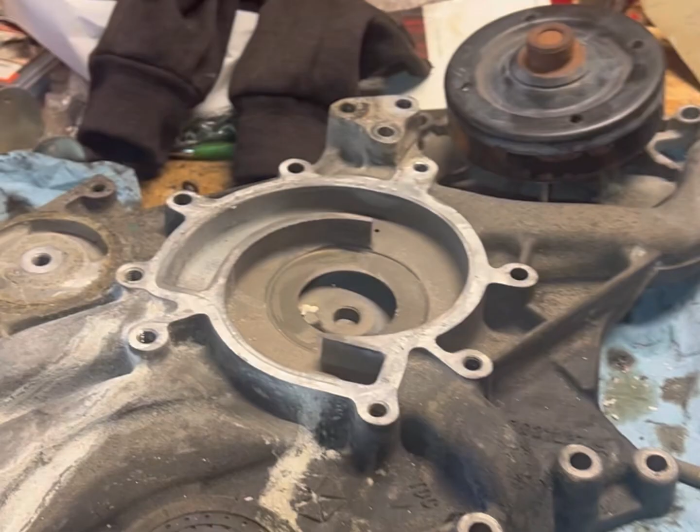So a cracked head would be the only issue with this pitting. And then also the water pump was bad, because if you look under here, you can see that it was leaking. I'm doing some research - I think I can fill that with some JB Weld, and of course get a new water pump.

Amazingly, the plastic housing survived the overheating, but we got everything off our heads. The bad head, obviously, we're just gonna get rid of, but the good head, we're gonna do valve seals, so that's why it's off.

Got the block cleaned up, and so we're waiting on our head and head gaskets for that, and they should be coming soon. We cleaned up our block here with one of these guys. Did pretty good.

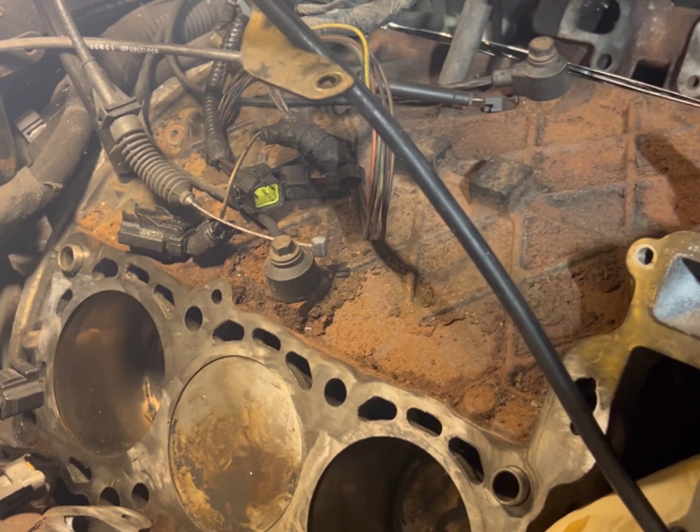Then what I'll do is, it left some plastic behind on there, so I'll just take some brake clean and clean that off.

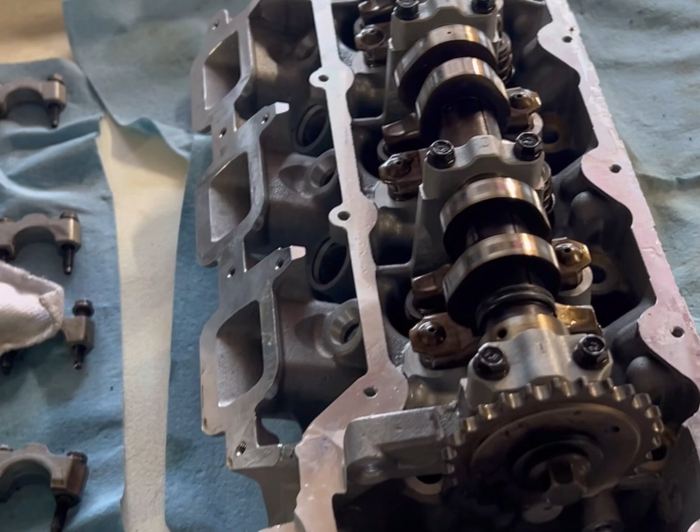Some of our parts that we ordered are the head gaskets. We ordered a new head for the driver's side. I did lap in the valves, so I got the head gasket on that side. Like I said, we got the cylinder head, and we also got some head bolts that came with the washers.

So I'm ready to throw my head in. The head that I ordered is from Rock Auto, and it's the right head and everything, but it came with an EGR block off plate.

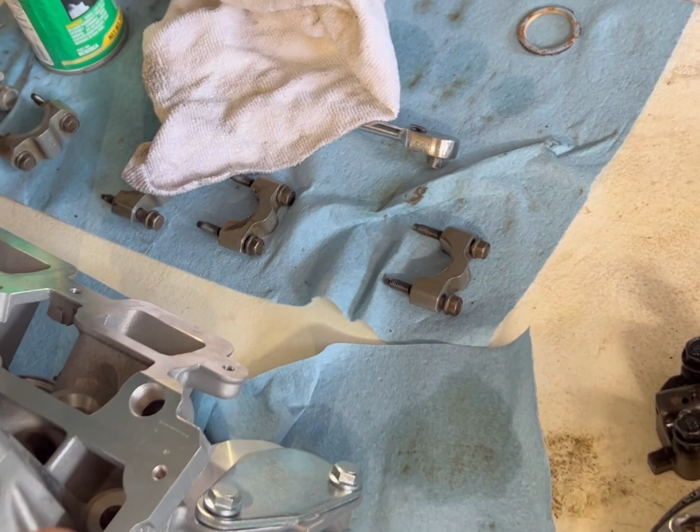The old head had that completely blocked off, completely filled in. So all they sent me with this head was the plate and the bolts - they didn't send me a gasket or anything. I'm only assuming that it needs some sort of something to seal it, so I put some RTV on there.

And other than that, I'm ready to put the head on. By the way, I soaked the lifters, the hydraulic lifters, in clean engine oil. I dipped everything - rocker arms were dipped in oil - and coated the bearing surfaces here with oil, and the cam lobes.

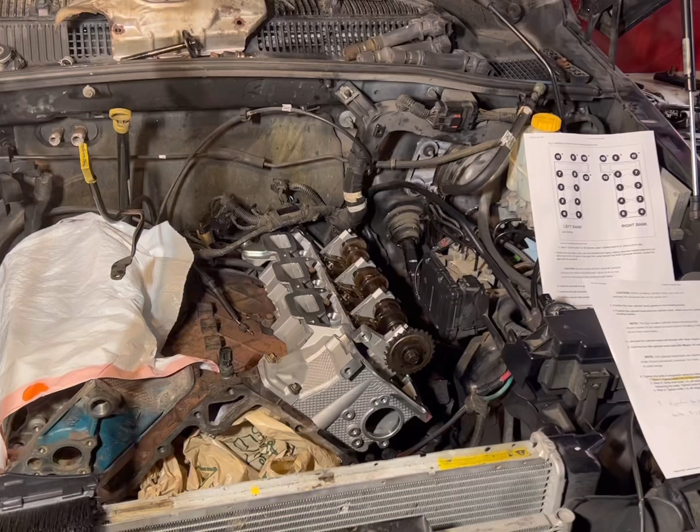All right, we're set up to torque head bolts. We printed out our sequence here online - pretty simple. Here's our sequence.

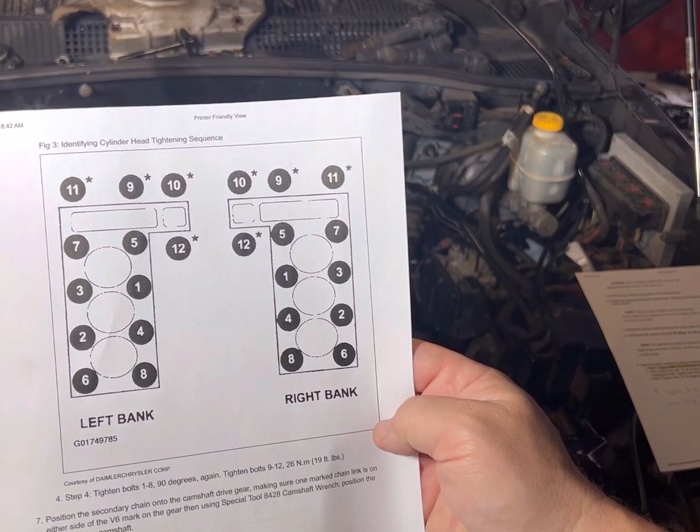So is it pretty simple? I've got set up - first of all, I'll tell you the 1 through 8 bolts. So our large bolts will get torqued down initially to 20 foot-pounds. We got 2 sets of 90-degree turns that we got to do on the big bolts. Probably just do that with a breaker bar or whatever.

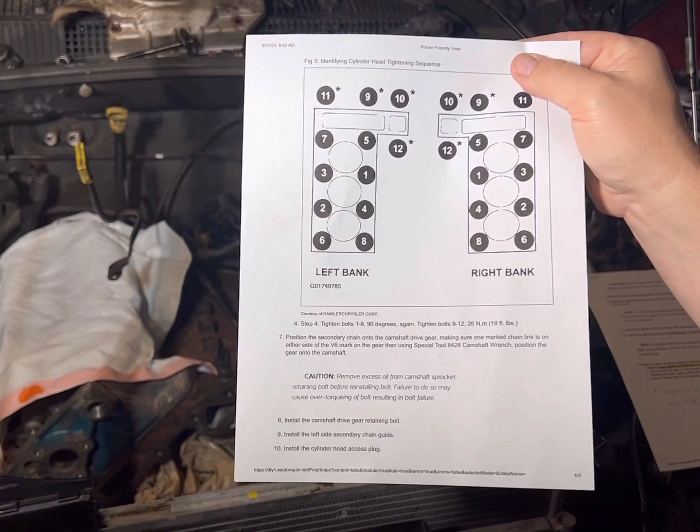The small bolts, 9 through 12, get torqued initially to 10 foot-pounds, and I think that's it for them. Nope - their final torque is 19, but they initially get torqued to 10 foot-pounds.

I did get some thread sealant. It's not Mopar thread sealant, but I got it at AutoZone - it's gonna have to work. They want you to seal these small bolts, so that's the first thing we got to do. This is a high temp thread sealant.

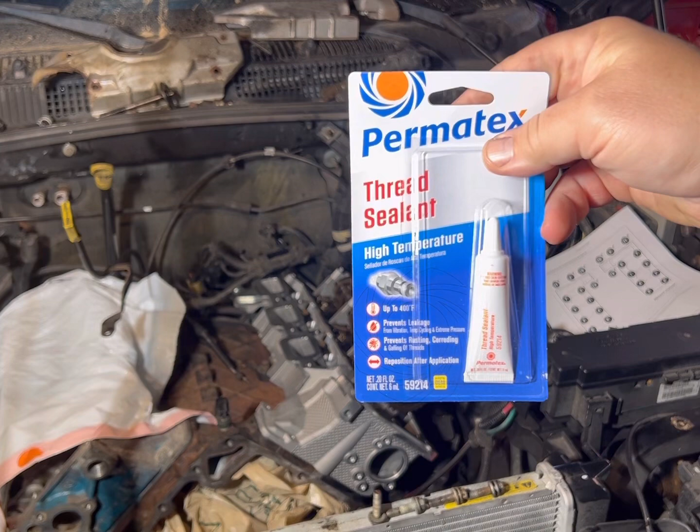Need the stuff, so we're just gonna do it anyway. So you have to do it like with dielectric grease and stuff. So the first 3 threads are clean.

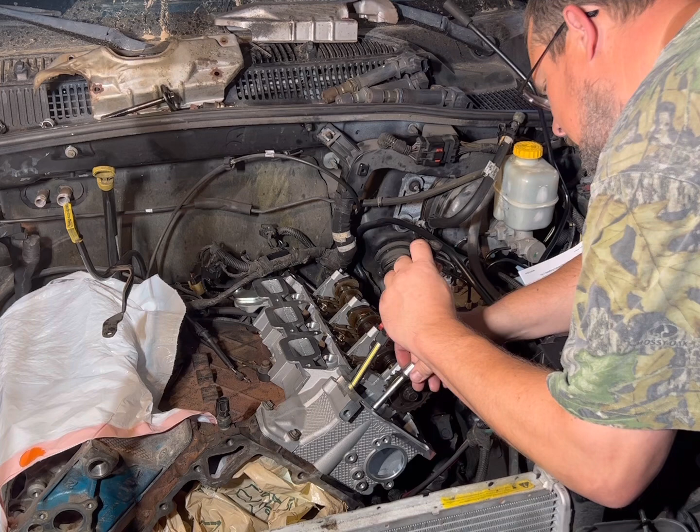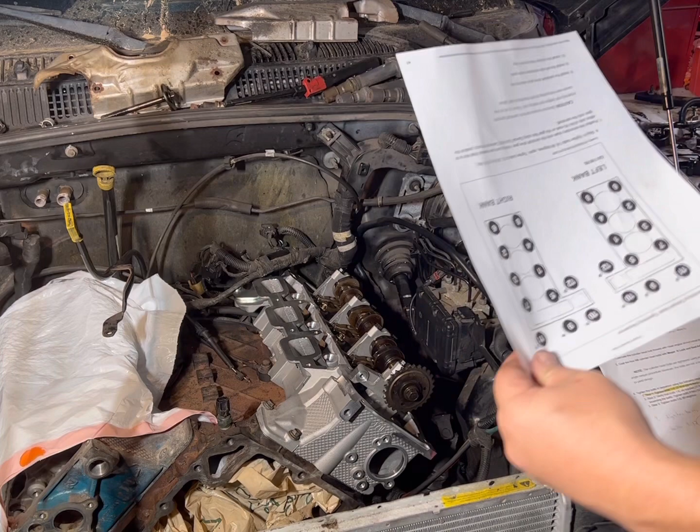One through 8, 20 foot-pounds. So I'm gonna set this to 20 foot-pounds. Left bank bolt - yeah, now we gotta do it like this, so we're not confused here. Number 1, that would be - that's just a little bit too much. I think I'm gonna try the 3-inch and then the 1-inch extension. The 1-inch with the 3-inch, we're at a 4-inch extension. Here we go.

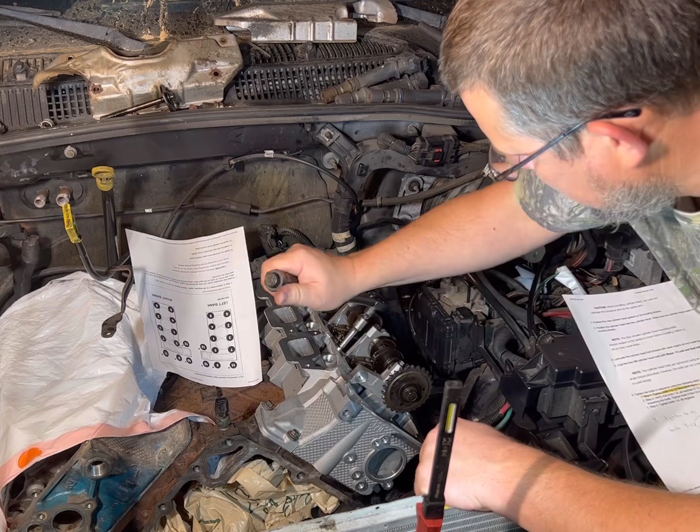Wrong one. 1, 2, 3, which is number 1. Okay, right next to it for 3. Okay, back up here for 4. Okay, number 5, skipping 1, and then at the end here. Well, this is a nice ratchet, nice and crisp. Okay, 6 - where's 6 at? 6 is over here.

In my first videos, I torqued down - well, the first car I did, the Highlander, I had a wand type torque wrench. They say the wand types are the most accurate, but mine just didn't seem right, so I didn't want to foul up someone else's car - over the years, it hadn't failed me.

Okay, and it says go back and check them for torque. No, I can see that. 2 - so yeah, it gets another like 1/16 of a turn there. 3, 4, 5, 6. But this Tekton is really nice. All right, so those 8 are torqued.

Alrighty, step 3 - tighten bolts 1 through 8, 90 degrees. All right, so I've gone through and marked these head bolts 90 degrees from the head, and then turn - they should be parallel. We can do it again, but I marked what we did already, so we don't have to turn it at 90 twice.

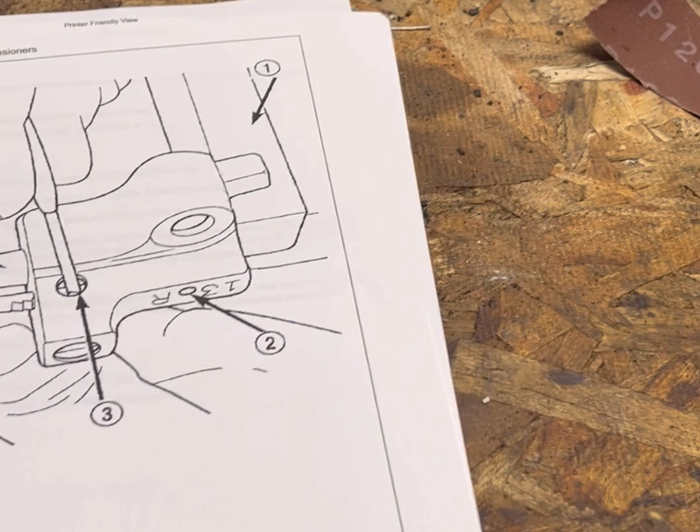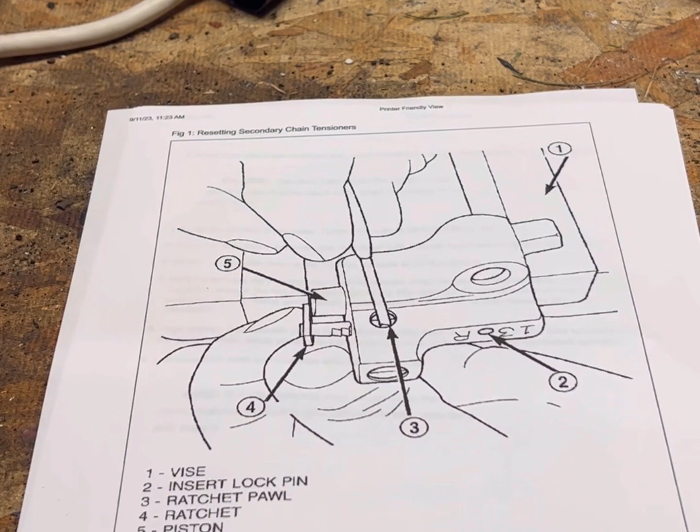All right, next step I believe is going to be the timing chains. I looked up in the service information and printed this sequence out, and they're showing us how to compress the secondary tensioners. We'll get to that. First, position the primary chain tensioner over the oil pump, insert the bolts, and torque those down.

We got some parts here, some timing components. So what do we got here?

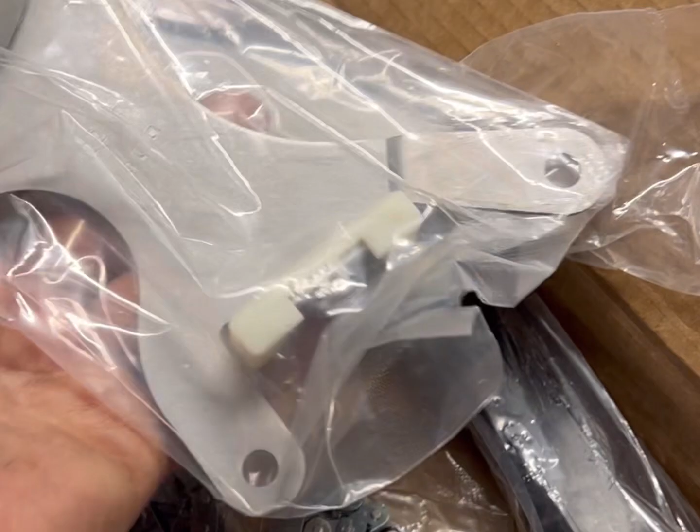All right, so our secondaries already have the grenade pin in there, compressed. There's that pawl there, so that's good to go. We don't need to compress them, they're new. We got our chain guides, chain guide tensioners, our main tensioner here, and what they want us to put on the primary.

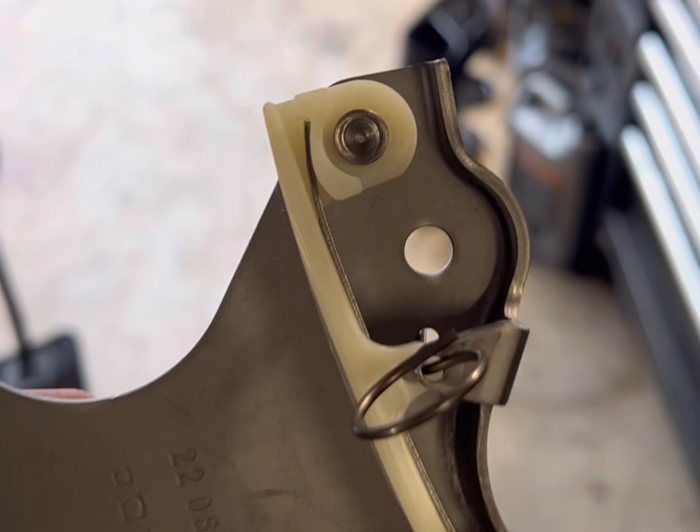We got all of our chains, our other tensioner. I believe we got coil, exhaust gaskets, and fuel injector O-rings, I believe that is. So you can see in there, you got the grenade pin, and then the spring's actually right in there.

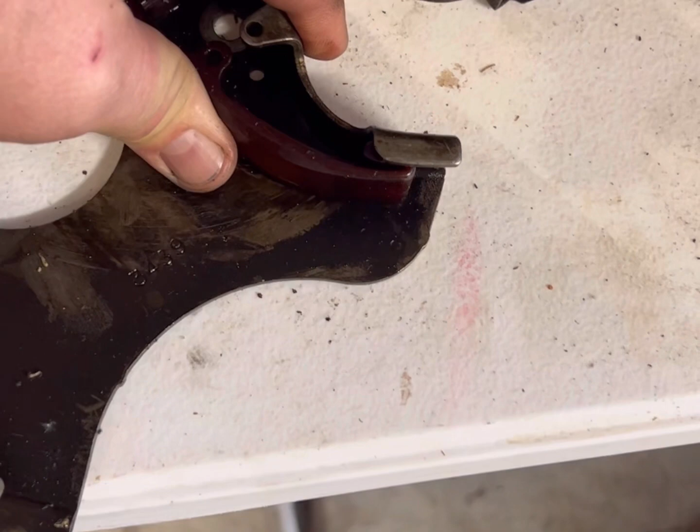So we're gonna bring this over here and check with our old one. That's how it pushes on there. I can't get it out of the way. I basically have to take a clamp if I was reusing this, but yeah, so this is going in the bucket of parts I won't need. I'll just put that on the floor.

Alrighty, excuse me, I believe this is the way this went on. I'm just gonna spin in this bolt here, and it says 250 inch-pounds. That torqued these two.

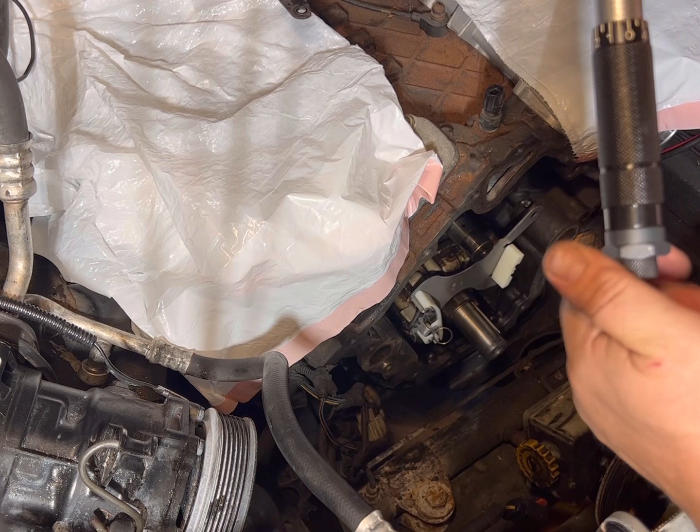Alright, we don't have my inch-pound Matco 3/8 drive there, it doesn't go up to 250, so we're gonna have to do some math here. 250 divided by 12 is what? So we're gonna go 20 foot-pounds.

Excellent. Alright, our next step...

Is to install the right side chain tensioner arm, install Torx bolt. Okay, our

tensioner guide arms here, from what I could tell, they're the same, so it's just on how they get put on the vehicle. So there's no right or left, same length and same everything. So we just gotta figure out where she goes.

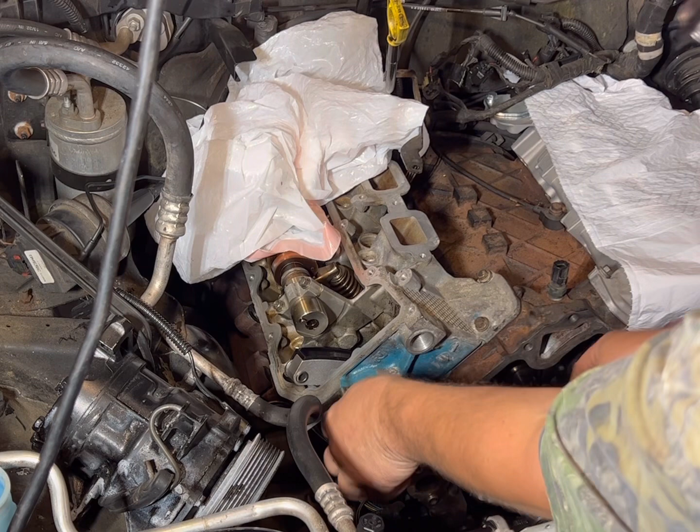So like I said, install right side chain tensioner arm, install Torx bolt. Okay, so this is a T40. Puts that guy on. This is Torx bolt, torque to 250 inch-pounds. So we're at still 20.

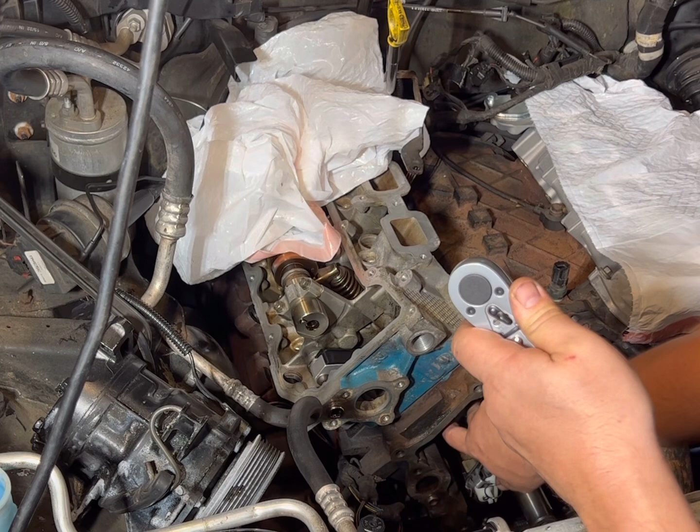Make sure they're free, it's not just notched somewhere that we can't move. Yeah, I think we're good. All right, excellent.

It goes like this, is up here, and that pushes, and then so that tensioner pushes down on the chain like from that point.

Okay, so this is what we have for replacements. All neoprene instead of... I mean, there's not much to this. This is probably aluminum, it's probably not a big deal, probably a little way to save money. I'm not sure.

Anywho, let's get ready to install. Alrighty, hopefully I don't bump you. Install the left side chain guide. We got to come in from this way. Maybe. Get out of the way.

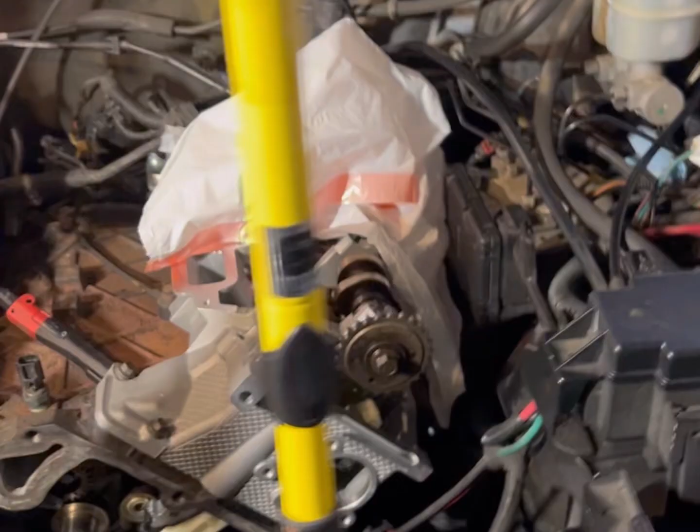Sometimes it's hard to decipher the sequence in this service info, but it says to install the secondary chains onto the idler bracket, which is what they're referring to. So you turn this, one chain goes here and one chain goes here.

The secondaries go to your camshafts. Probably obvious, but if you look at it this way, the inside one's going to be your passenger side, and the outside one's going to be your driver's side. At least that's the way it looks to me.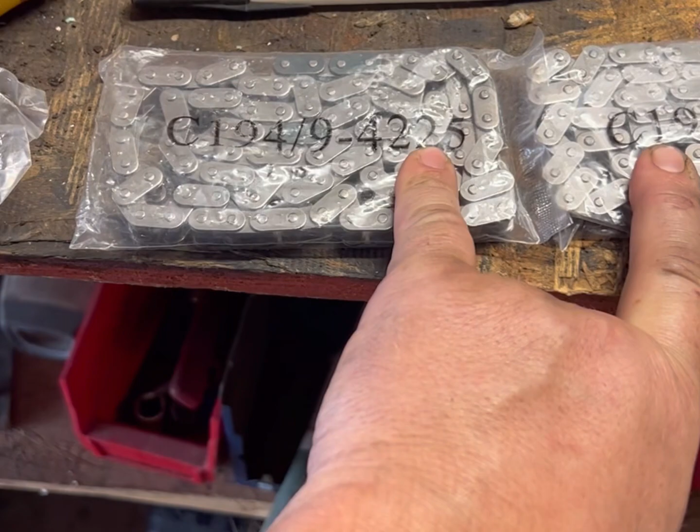So we're going to install those. The chains on there are the same part number, so it doesn't matter which one right now. Maybe that's what they're getting at. Our kit comes with the same part number here - these two longer ones, and then the primary one.

They want, of course, a special tool to keep these chains on, but what I'm going to do is get them on and zip tie them so they pinch themselves against and don't fall off.

I saw that, I want to say Boss Garage, when he did one of these 3.7s. I watched that video. So if you want a different perspective, you can watch that.

But here we go. Okay, so it says you've got 3 holes here. Line up a set at the 4 and the 8. Okay, I put this timing mark on top.

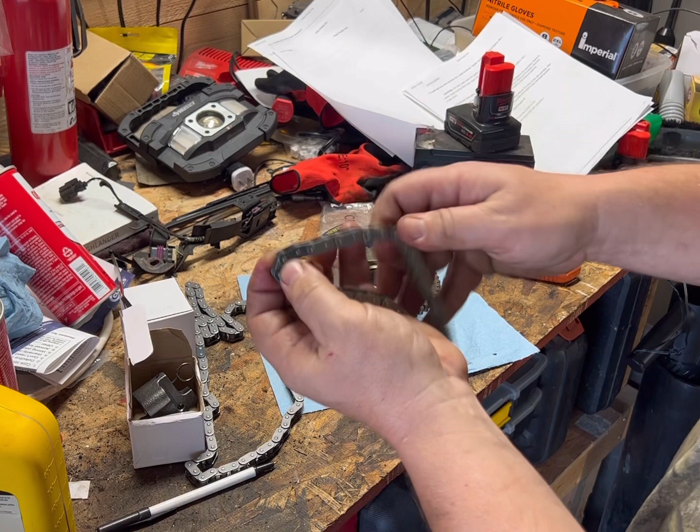But what I found out is you've got your 2 marks here, and it says you want to line those up in the holes to where you can see the 2 links fully.

The first one we're going to do is the bottom one, so we can see it, and then we cover it up with the top one. So the bottom one's going to the passenger side, and the top one's going to the driver's side. The first one we're going to put on is the bottom one, which is the passenger side.

We want to make sure that, like we say, we see both of those in the window. I'm assuming, I know you can't see the blue marks, but kind of there, I'm assuming that's good. Okay, if you read on, it says align primary chain double plated links.

With the timing mark at 12 o'clock. So that's what we have here now. After we have 8 o'clock and 4 o'clock, you can see the blue links on this one. And then we zip tie them.

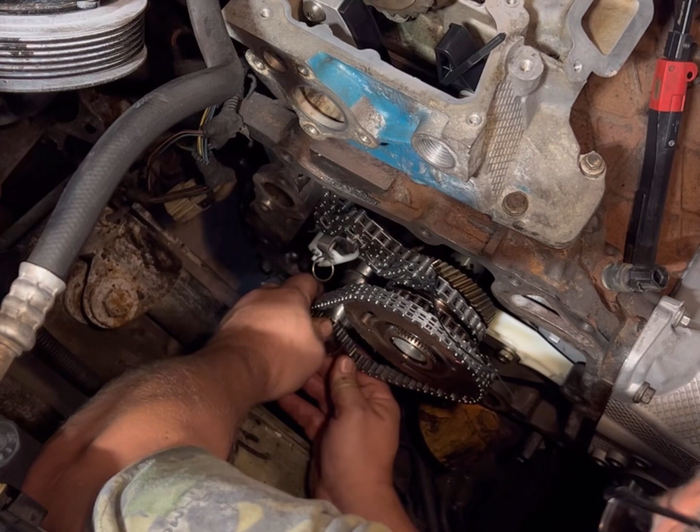Okay, we're going to go ahead and install this assembly. It said to lubricate the idler shaft, which we did with clean engine oil. Okay, now there we go, just got to slip it on. There we go.

Okay, now this one. Oh well, this one's just coming right back. This has to go into gear - idler gear back here somewhere. Okay, little guy, there we go.

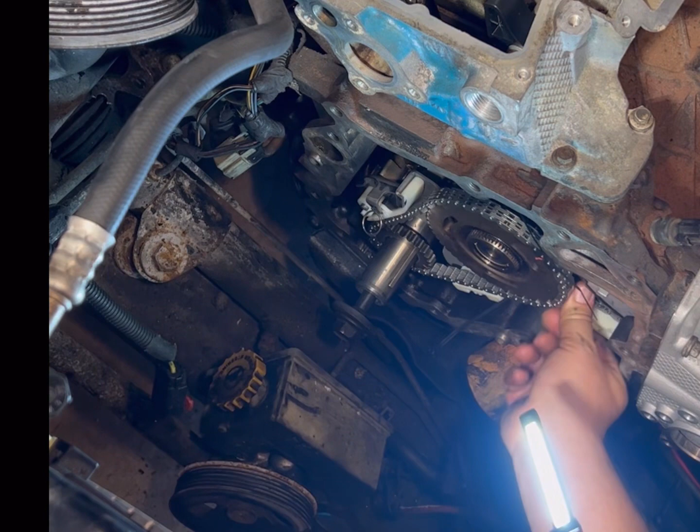Everything's got to be in there, everything just got to go in like a puzzle. Now we just hope our timing marks are right.

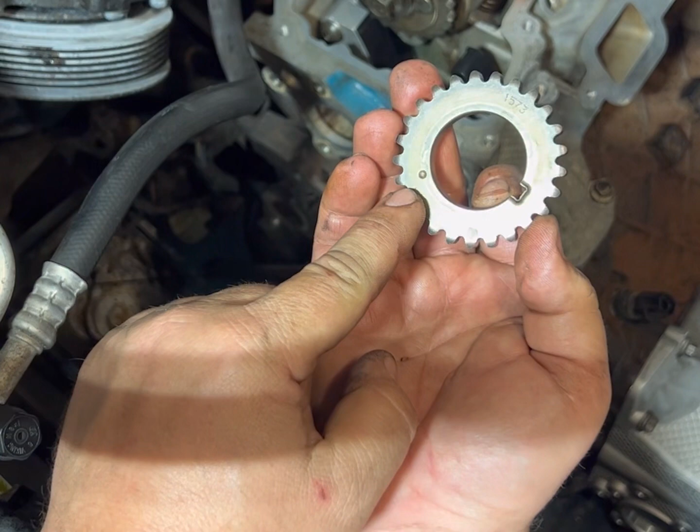Okay, so I'll show you what I did - had to take it off again. Our timing mark here has to be aligned with that black link down here, because it's 12 o'clock for the 2 up here, 6 o'clock for the black link down here.

Now I had to turn the crank a little bit because after messing with it, it got a little off, but I think we're right there. We're just going to make sure we're lined up with the black link.

Oh come on, okay, now we're off. Alrighty, black link, yep, sorry you can't see that, but my notch is not lined up. Okay, the more you go along, the more things make sense. I had to take it all back off.

The idler sprocket must be timed to the counterbalance shaft drive gear before the sprocket is fully seated. So that's this guy in here, and you can see the timing mark on there.

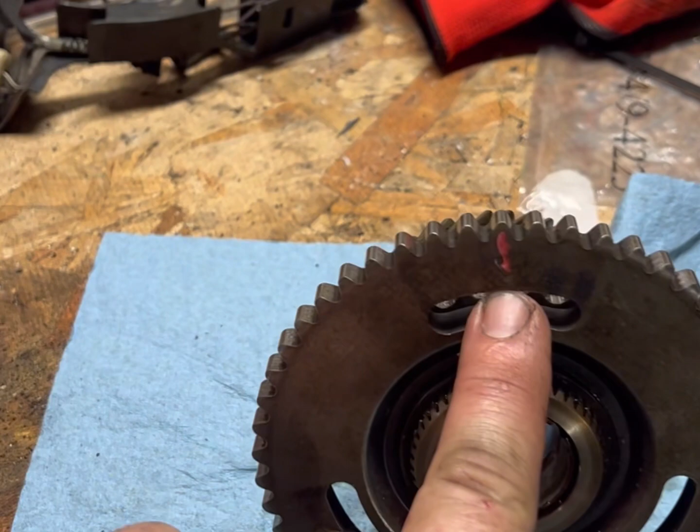So when I had it installed, I didn't see the timing mark. I just assumed I would line it up here, but you can't - that's just kind of a fuzzy general area, you can't really make sure. I was looking a little closer, and there is a painted mark here.

So your timing mark is going to slide right in there. I didn't see it in there, so this time we know it's right the way we put it. This is up, we'll redo our chains.

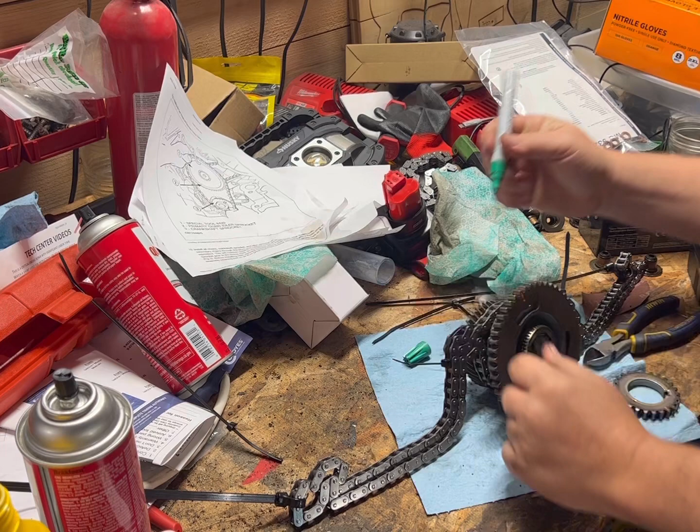So we're going to take these two marks and extend that onto the gear so we can see them. Primary timing chain, so right here.

Right one tight, it's in the guides, ready to go as soon as we're off a tooth.

I don't know if you can see that, just a smidgen. It wants to go in, so as soon as we... there we go. The hole's lined up, I'm going to pull our other one through.

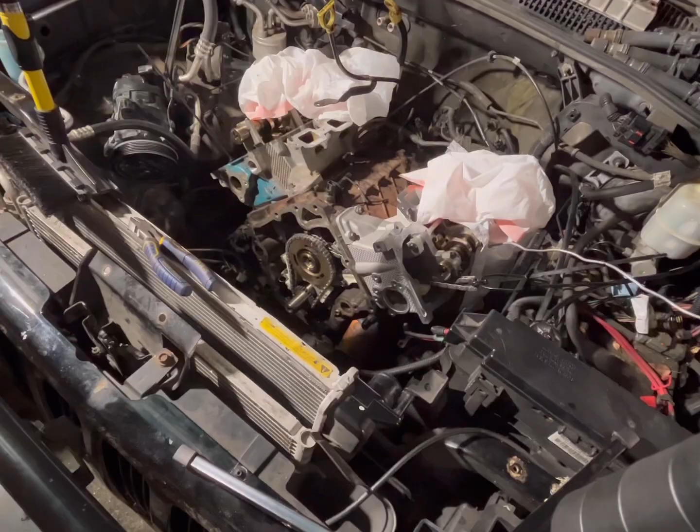Maybe another zip tie. Zip tie this one off. Zip tie off.

Marks are between our timing mark. We got, hopefully, we're going to double check our links in here and here, and then down below make sure that the timing marks lined up. We should be good.

Alright, so let's align our timing mark on the chain here with our L on our sprocket. It may or may not be lined up, I might have to turn the cam. So we will see.

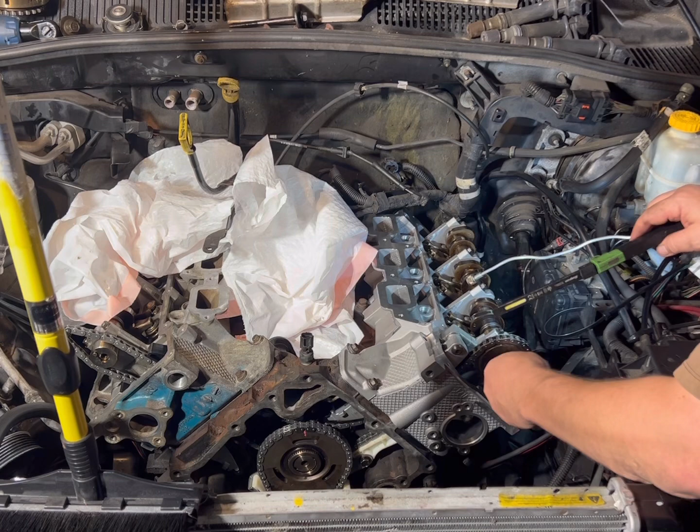Golly, might just be. Let me get that held on. All right, it is, just gotta get it seated. Okay, she's seated, I believe.

No, it says it's got to be on the R. So we'll have to rotate the camshaft.

Oh man, that's scary.

So, I'm going to put it on the R, and then just rotate it until it needs to go back this way. Get the bolt on.

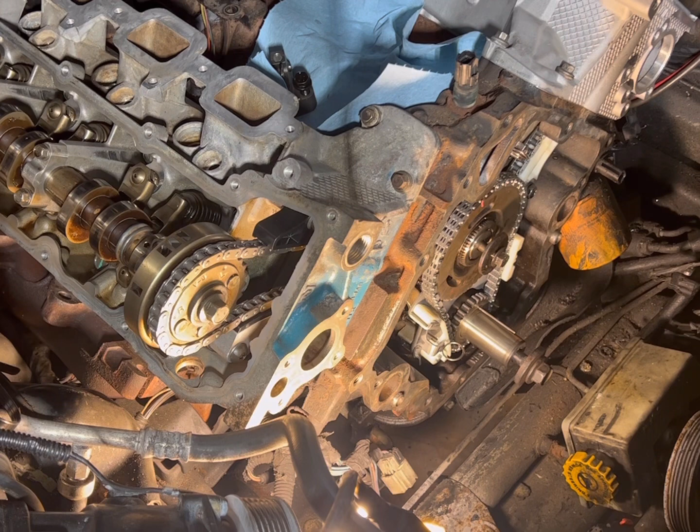Okay, and started. Sure she looks good. Looks good, it's sitting in its notch. We're gonna torque to 250 inch-pounds, or 20 foot-pounds.

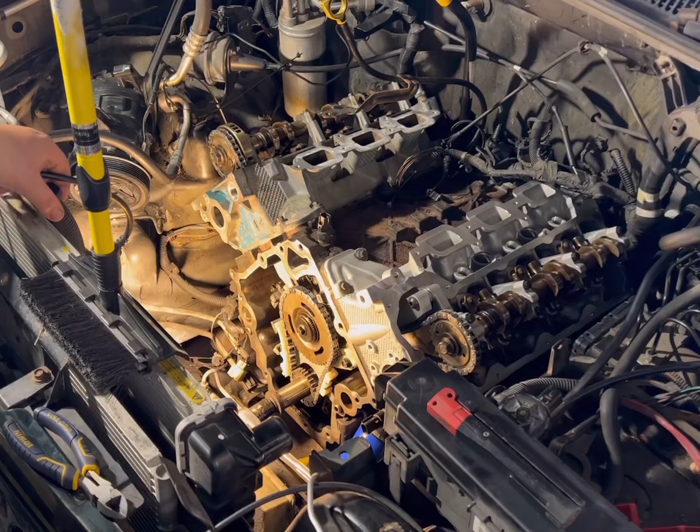250 inch-pounds. Oh hi. I just want to rotate it a few times to make sure that we're good to go. And then we got to work on the timing cover next, and I'll show you what's going on with that.

I got this bolt here torqued down. It was 20 foot-pounds.

So we're coming around back up to where we're supposed to be at top dead center. So on the back side of this, we have an O-ring that goes here, and an O-ring gasket that goes here, and then one that goes here.

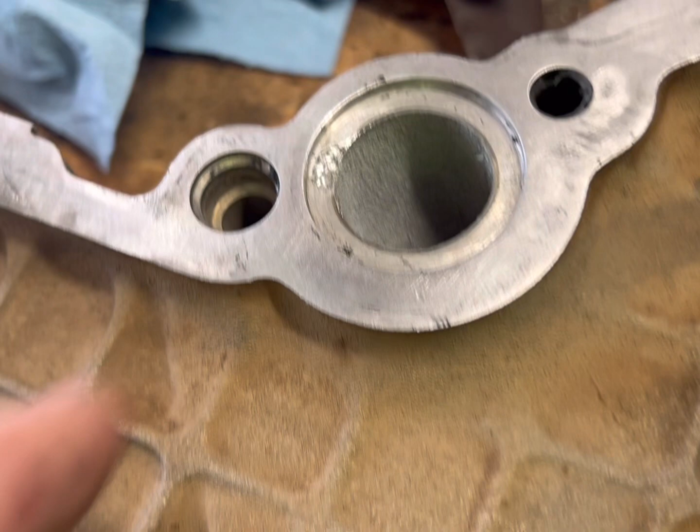Now there's more of that pitting right here. So I kind of took a drill bit and tried to get as much dirt or dirty aluminum out of there, so I have the maximum adhesion with the JB Weld here, high heat. We're gonna do the back side, but I just wanted to show you that. We're gonna tape it up and make sure the back side is clean.

And when we mix up the JB Weld, I just want to be able to do the back side because that's the biggest portion, and then come around here, peel the tape off, and do this side. The rest of this stuff looks pretty good on this side, so this is what we really need to focus on.

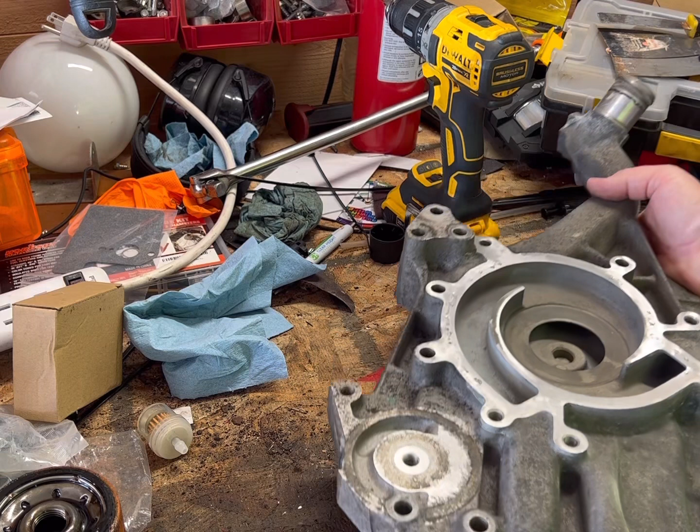I know I showed you this before, but we're going to drill out some of those, just try to get as much dirt out of each one of those. We also have an engraver over here, and maybe it'll tap out some of that dirt. So let's see what happens. Let's try the engraver first.

I think the engraver is working pretty well. It's like a teeny tiny little slag hammer. It does pretty well, chipping some of that dirt out.

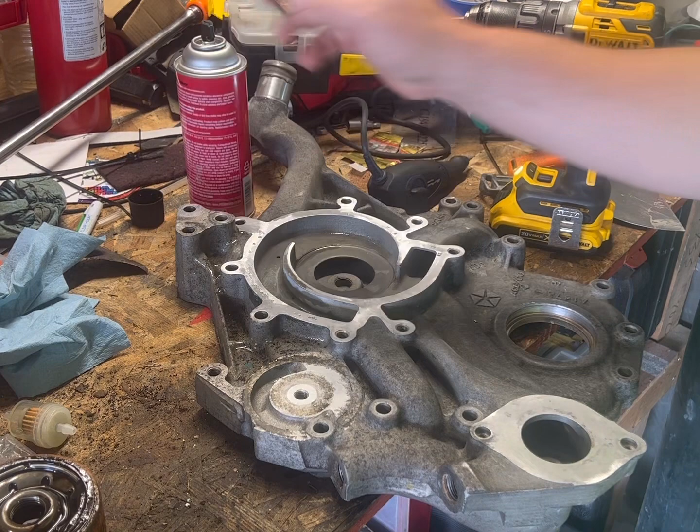This looks like here. Probably do some more, but you can see some of the pitting. Like here, I would just take that drill bit, trying to get as much of that dark stuff out. I mean, I could maybe get by with just siliconing this, and I still might, but I haven't decided yet.

All right, here goes nothing. Try to get 2 even amounts. There we are. Now let's leave that, might need a little bit more of the steel over here.

Work her back and forth, get it in those holes. Just need like a little sheen on top. I'm not sure if I'm gonna have divots after I put this in, so I'll smear a little layer on top to cover that. Just do a little buttering.

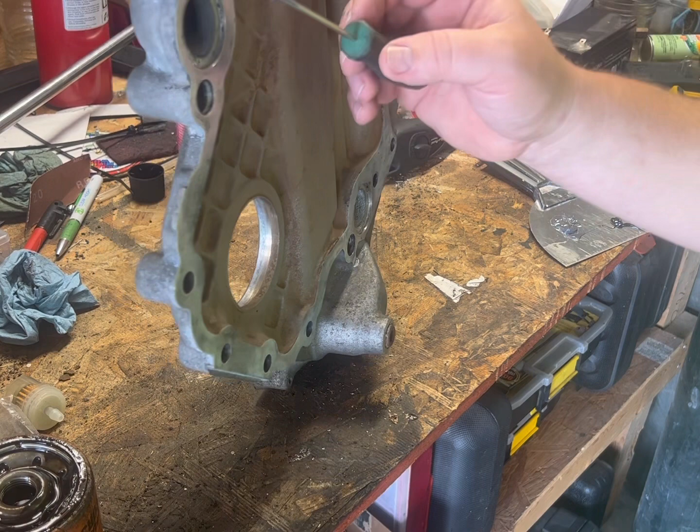Where's it? Get that guy out of there. Alright, start curing this little dribble. So that's kind of how I envisioned what I would be doing. Let me get this back side here and try to stand it to where I don't... big chunk here, this is quite an amount of pitting here. Hopefully that little ridge doesn't give out.

Okay, we're waiting for that JB Weld to cure. I still haven't torqued these two sprockets. They get torqued to 90 foot-pounds, so we're going to go ahead and do that.

90. Now there's a special tool to hold these cams, there's a hole right here, it's supposed to be like a spanner wrench, one on each of them. But somebody had already put some pipe wrench teeth marks in the shaft, so as long as they did that, we're gonna use them too to torque these. Nope, going for a ride.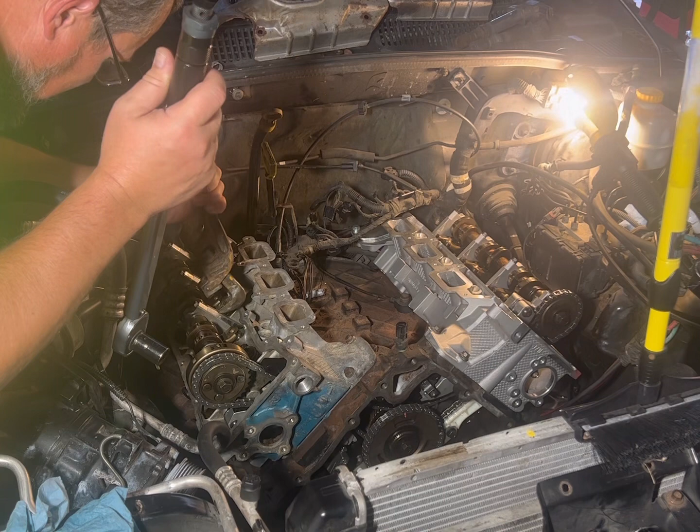Oh, 90 foot-pounds is right there. Alrighty. Torqued.

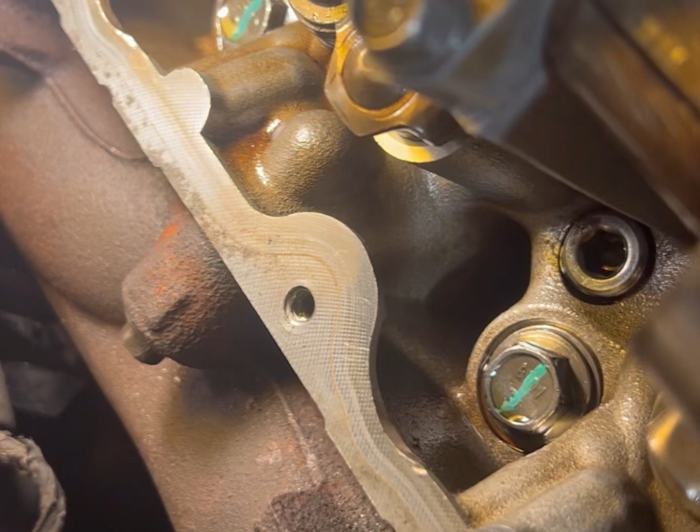I went ahead and put these exhaust manifolds back on with the new exhaust gaskets. They were kind of a pain. These end ones are slotted, and I had ended up tapping this one because I had it in crooked. I had to push against the exhaust this way to restart it again after I tapped it. That was really the only one I had trouble with.

But on their end, I just need to tighten them down. They're 10 millimeter, and then put my covers back on. They're not too bad, you can slip your arm through here underneath, really no biggie.

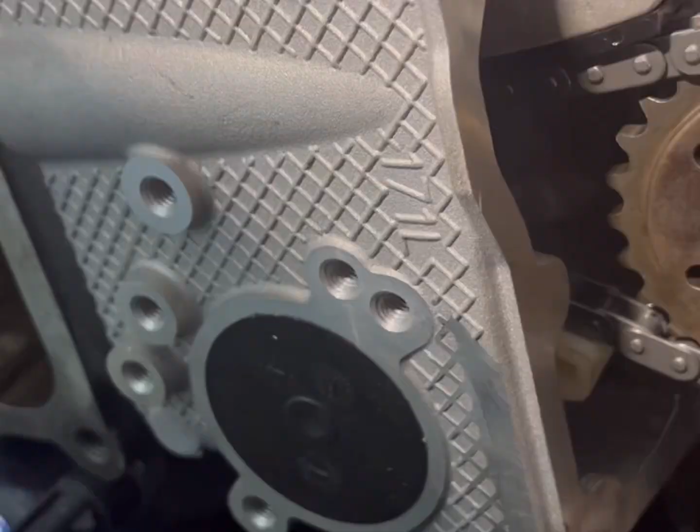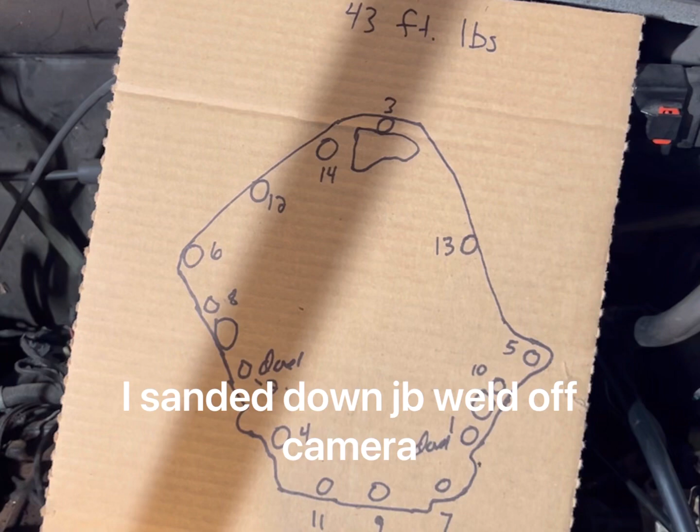So I went ahead and put my plug back in there, the 29 millimeter, and that plastic cap. Okay, we're gonna be putting this front cover on. Service information says 43 foot-pounds, here's your torque sequence.

It shows in the service information where you put your sealant. I kind of drew it out here. Now it gets tricky over here because it shows you putting it on the cover, but where do you go from here? Well, I just kind of figured out that on this side, basically comes around that little bubble there, it just comes straight down. Like I said, the picture doesn't show you that, so I drew it out here to give you an idea. I'm gonna clean that off, obviously, and then that marker, I'll clean that off, and then we'll put the sealant

on and torque this puppy down. Alrighty, we got this cleaned up. I'm gonna take some of this Loctite sealant, high performance RTV, sensor safe, high temp, oil resistant. The service information obviously is going to tell you to use the Mopar stuff, but I think this is going to be good to go.

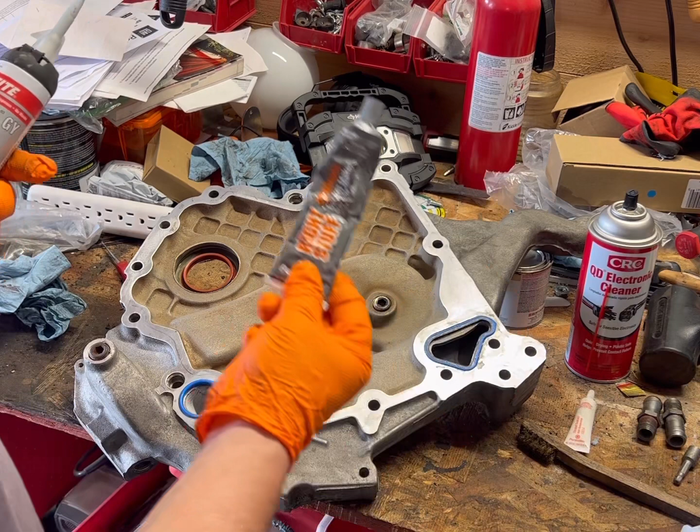The reason I like this is because of the applicator. You know, this stuff is great, it's great stuff, but it's really hard to apply when you really need to get it precise and put it on right. You don't want to put it on too thick because that sealant may bead out and break off and get into your oil, specifically into the pickup screen, and you don't want to slow down your oil pressure.

So here we go. Let's start right here. See, this is just the perfect applicator for this, it's nice and slow. It's good stuff.

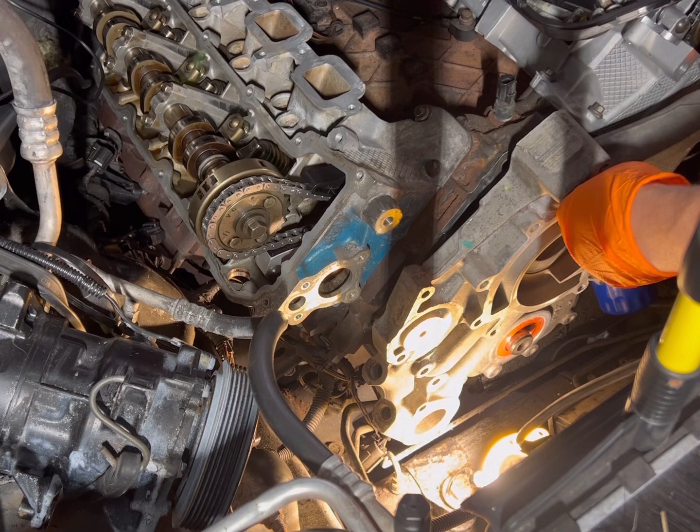Alright, got my numbered bolts ready here, 1 through 8, or 1 through 10, and then the top 3 are the same length. But I think this will work just as good. So, I got it lined up on the bottom seal there, and so I'm gonna push this in, make sure he's lined up.

1 and 2, which is right here, I think. 1 and 2. Is that right? 4, 2. Yep.

We're going to incorporate the water pump, the old water pump. We haven't got the new one yet, but we're going to incorporate the old one so we can get these torqued down.

Above 10. There's 9, so, I mean, not 9, but 6. All right, here we go. Down yonder, that's 9. Okay, that makes more sense now anyway. Shorter bolt. Nine. 11. 12.

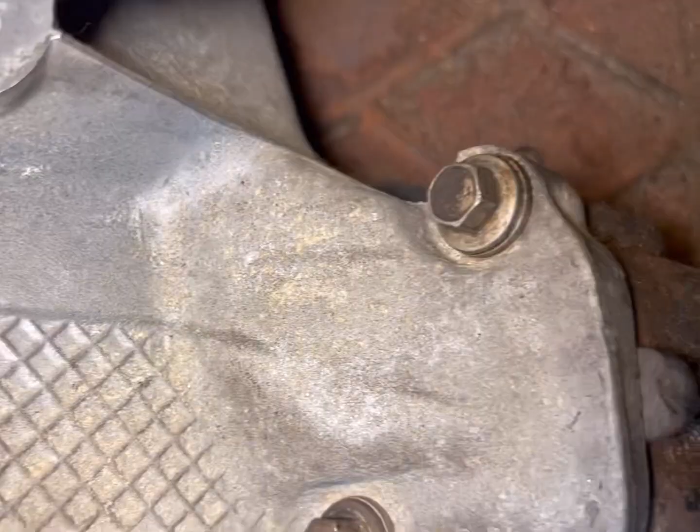Okay. Feel better? So, I'm just telling you about the bead, you see how it rolls out right there. That's what you want, just roll out an even bead. It looks like on the inside. Yeah, I'm happy with that. Let that set up, we'll probably go ahead and install our valve covers.